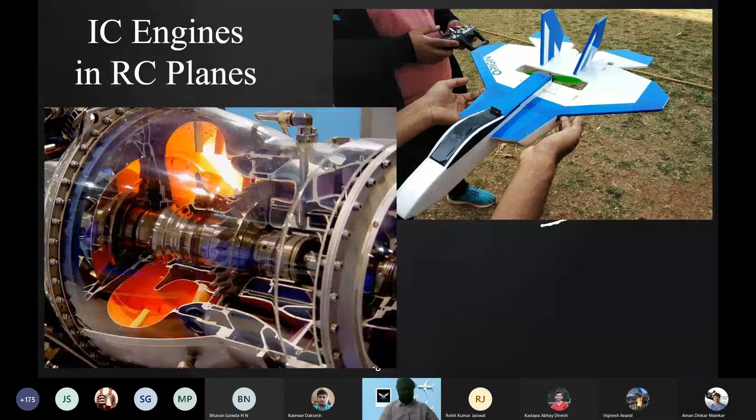One is IC engines. You might have known that generally the aircrafts that we make are battery powered. Your batch could be the first one to learn about IC engines, internal combustion engines, and their utility and implementation. Also, you know what? Your batch will probably be the first batch to be able to collaborate with the Aeromodelling Club to design and implement IC engines during your stay in INSTI. Isn't that exciting? Another is rocketry.

Also, you know what? Your batch will be the first one to decide over some of the GD topics. Yes, you are freshers. Anything, any idea that pops up, tell us in the chat box. Anything. Also, if you have any other ideas and don't want to discuss here, feel free to post on the WhatsApp groups you're a part of with us or DM us on Instagram through our group or anyone in person. Probably the GD you discuss with us is probably the best one that we ever have.

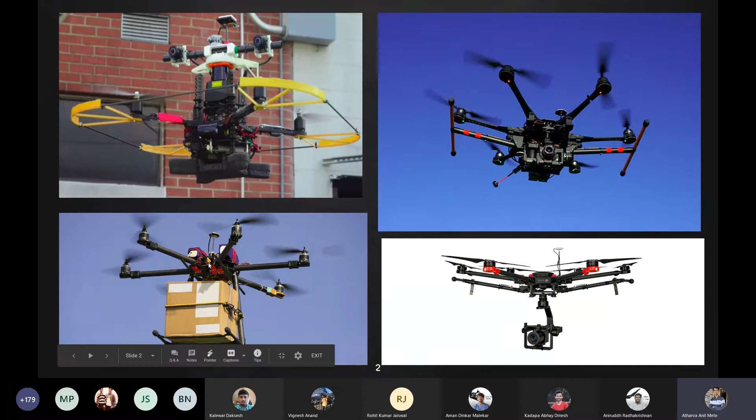So in this slide, you can see this is the drone used for reconnaissance missions. Here we have all the sensors like cameras. One camera is down, and this is the 3D lidar. This is usually used in a GPS-denied environment. This is the aerial photo. These types of drones are used in the film industry for photography, and you can see this is the drone used for delivery. So it has a lot of applications.

So let's talk about making a drone autonomous. What does it need? For making it autonomous, first of all, it needs localization. What is localization? The drone needs to localize itself with respect to the environment. What does that mean? It means it has to determine its current position with respect to its surroundings, right?

The second thing is perception. What is perception? Perception means sensing its surroundings. So it has various sensors on board like radar, camera, and many others. So it has to sense all these surroundings, and then it has to map the surroundings so as to see where the obstacles are and where the free space is.

Next thing is path planning. So till now we have our surroundings, and we have mapped them in terms of free space and obstacles. Now we set a start and goal position. Let's say point A is the start and point B is the goal. What path planning does is determine a path compatible with drone dynamics, with the path avoiding all the obstacles.

And the last thing is control. Control people basically make a controller, and the controller decides what thrust should be given to the motors so as to move our quad on our desired path.

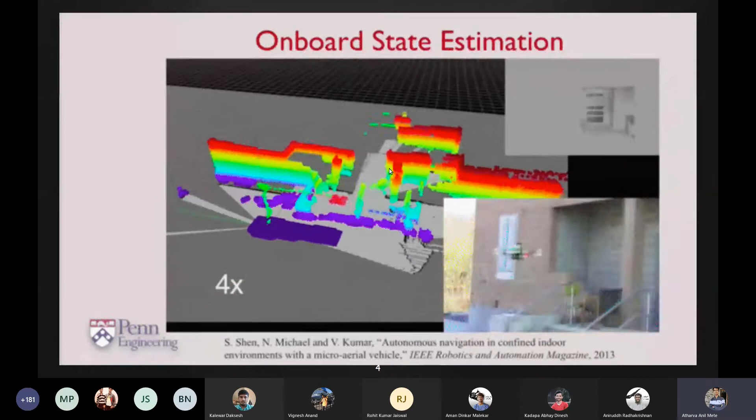So let me show you this. What's happening here is, this is the quad, and it's the same quad which I showed in the last slide. It has all the onboard lidars and cameras on it. It's moving in this house, which is a GPS-denied environment, and it's unknown. You can see here as the quad moves in, the lidar is basically mapping all the walls and free space and giving them color accordingly. So in this way it maps the environment.

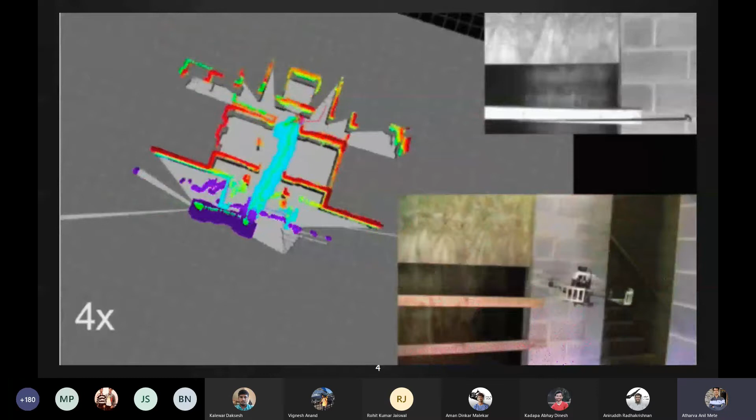This blue line is the path planned by our path planning algorithm. So this is pretty exciting, and let me tell you, don't get overwhelmed by these things, because you will surely get to know them over the years.

So now we had planned to show you a live simulation demo. Another thing I'd like to tell you: we had planned a live simulation, but there is quite a load on my system. So I just recorded a video. It's recorded, but it will be the same as the live one. So let me share that.

Yeah. I hope it's visible. Can someone confirm? Yes, it is. Okay. Cool. So yeah.

So what's happening here is, we are using this platform called Gazebo. It's a simulator. In this simulator, we have made this nice arena with frames in it, and I will zoom in on it. This is the quadcopter Iris. In this whole simulation we are using PX4 firmware. What PX4 firmware is, you'll get to know, but for now it's something with the help of which we can control the drones, right?

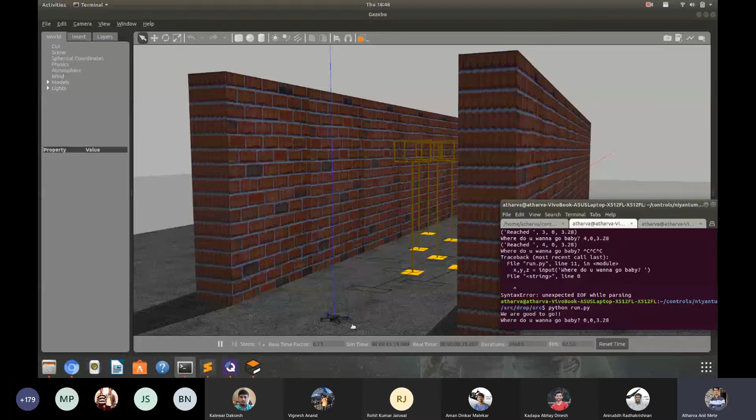You can see the propellers moving. That's what PX4 firmware is for, and for communicating our Python script to PX4, we are using the MAVROS communication system. Again, I'm saying don't get overwhelmed by it. So now I'm giving it a set point, which is 0, 0, 3.28, and you see it takes off to that particular position.

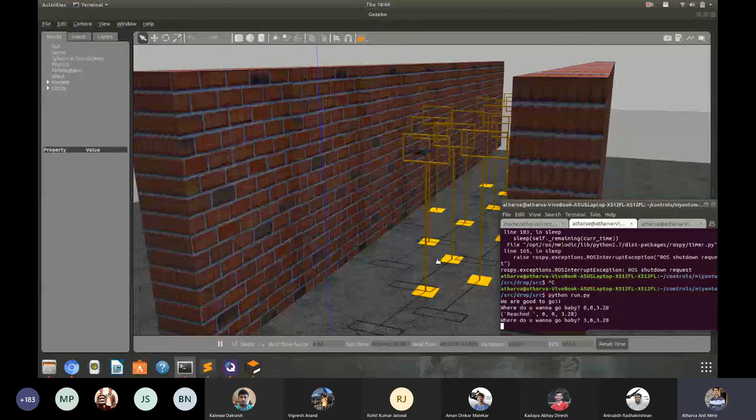And then I will make my quad pass through that frame. For that I'm giving the set point 3, 0, 3.28. So the quad will move to that particular point. And see, although it's simulated, it's quite similar to a real environment. We can even simulate wind in this.

Yeah. See, and again I'm giving the point 3, 0, okay, yeah, sorry, 5, 0, 3.28, and you can see the quad passes through that frame.

And let me tell an interesting thing, that I'm doing this by giving the coordinates, right? But in another mission, what we did was, you can see there is a camera in front of the quad. So what that camera does is, we use some machine learning algorithm and image processing to recognize these frames. So from the camera frame, it recognizes that particular frame, and then it finds the center of that frame, and then we publish that center to our code.

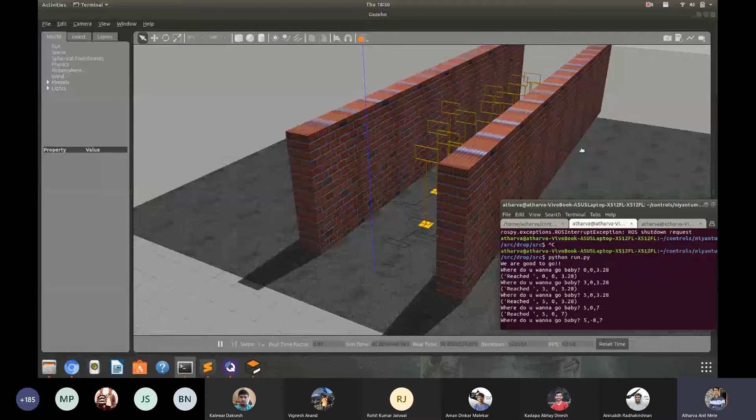So it's fully autonomous. We have made this system, but I thought giving coordinates would seem more interactive. So that's why we are doing it. But yeah, we have also made this system fully autonomous. So for localization, we generally use SLAM systems. SLAM is simultaneous localization and mapping. Again, don't get overwhelmed. You will get to know all these things, and it's pretty interesting. And see, the club is here for that.

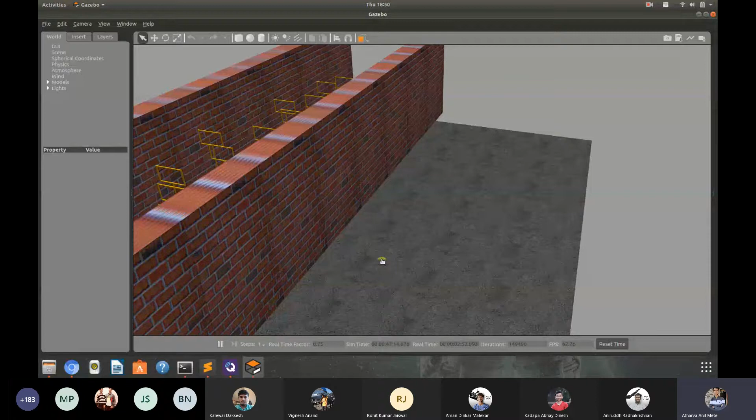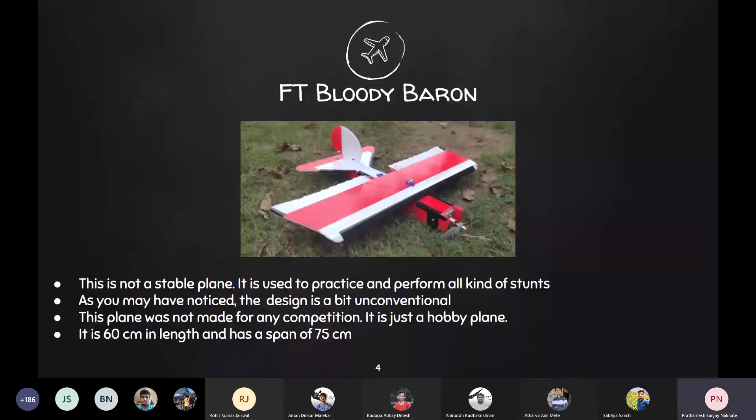So before showing a model of a quadcopter, I want to ask you guys a question. As you might know, in quadcopters, one pair of the motors rotates in clockwise direction and the other pair rotates in anti-clockwise direction. So do you guys know the reason behind this? If yes, you can answer the poll which I have posted in the chat, and if no, you can still try.

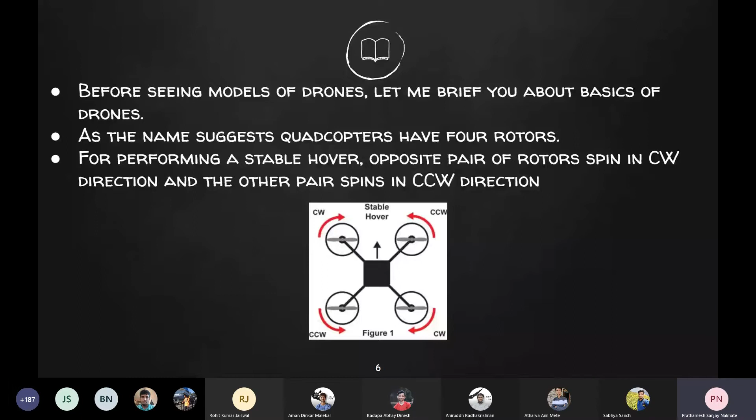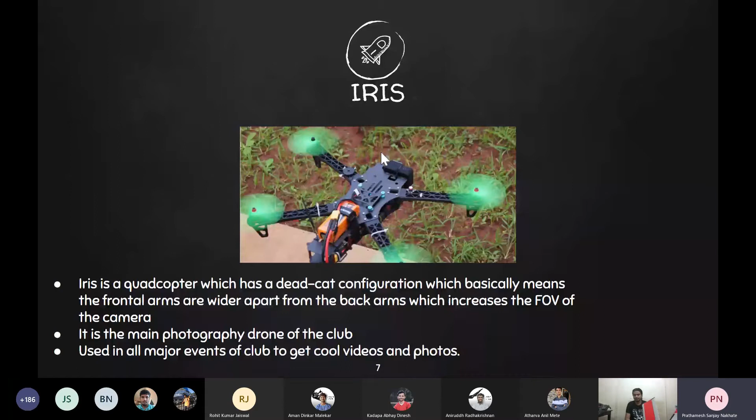Actually, this is the main photography drone of the club, and it is used in all the major events for taking cool photos and videos.

So till now we told you the different models that we have built, but you may wonder, where do we build these models? So actually there is a laboratory known as the Tinkerers Laboratory. It is the only student-owned laboratory of our institute, and it has all kinds of equipment like laser cutters, 3D printers. It also has some basic electronic components like Arduino, servos. So that's where we build them.

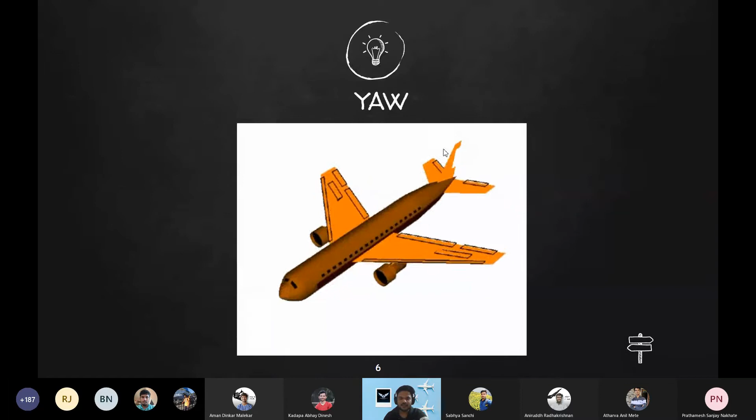So let's move to the control surfaces. All of you have seen the black parts in the wings and in the horizontal stabilizer or vertical stabilizer; those are called the control surfaces of an aircraft. So first we will talk about the rudder. The rudder is this, and it is the hinged part of the vertical stabilizer. It is used to deflect the tail from left to right as viewed from the front of the fuselage, and it does the yaw motion.

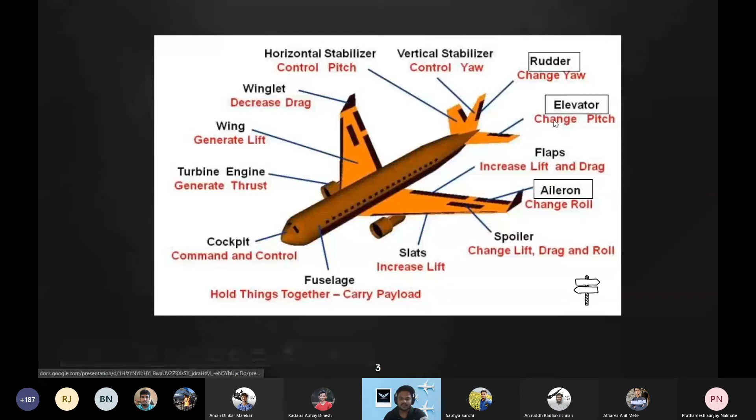Yeah, so now come to the elevator part. It is the hinged part of the horizontal stabilizer and it is used to deflect the tail up and down. Now let's come to the aileron. It is behind the wing and it is used to change the roll of an aircraft. You would be doing this in an RC plane.

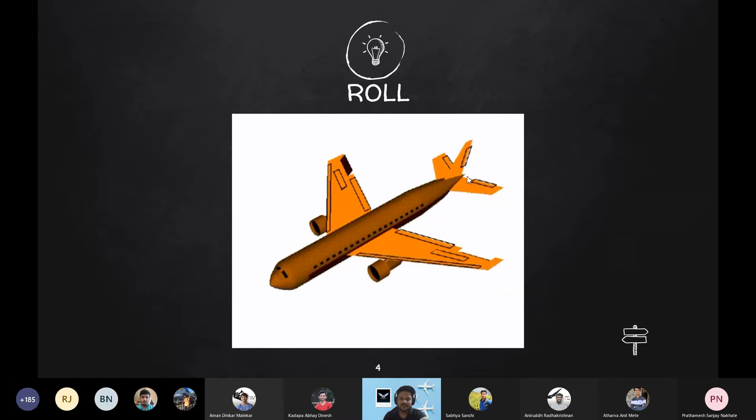Here is an exercise for you all. Next time, whenever you fly on an airplane, notice that the wing control surfaces move during takeoff and landing, and they are different in takeoff and landing. Additionally, you can try to observe that when the aircraft turns, its control surfaces are different.

Now let's come to the wing nomenclature. All of you are designing your wing in the glider event. So these are some technical definitions regarding the wing geometry. The front of the wing at the bottom is called the leading edge, and the back of the wing at the top is called the trailing edge. And the distance between the leading edge and trailing edge is called the chord, that is this, and it is denoted by C. So this is your chord.

Now the distance between the ends of the wing is the span, and it is denoted by S. The shape of the wing when viewed from above looking down onto the wing is called the planform. And in this figure, the planform is rectangular. The chord length at every location along the span is the same, like this. Everywhere it is C.

So can you think of another type of wing where it will not be the same? Like how about the triangular wing? In a triangular wing, the chord is not the same. And one more thing, the wing area is not the total surface area of the wing.

That is not the curved surface. The wing area we took is the projection area of the wing. Now let's come to a very, very important aspect of any wing design: aspect ratio.

Aspect ratio is a measure of how long and slender a wing is. The aspect ratio of a wing is defined as span squared upon area of the wing. And for this case, the aspect ratio is span upon chord. Now, this is the definition of aspect ratio mathematically.

But an obvious question is why it is so important in flight design. Well, a good aspect ratio for any aircraft provides sufficient lift and also reduces the drag. In general, high aspect ratio wings have long spans, like high performance gliders, and low aspect ratio are like fighter jets and all. Now let's come to the dihedral angle.

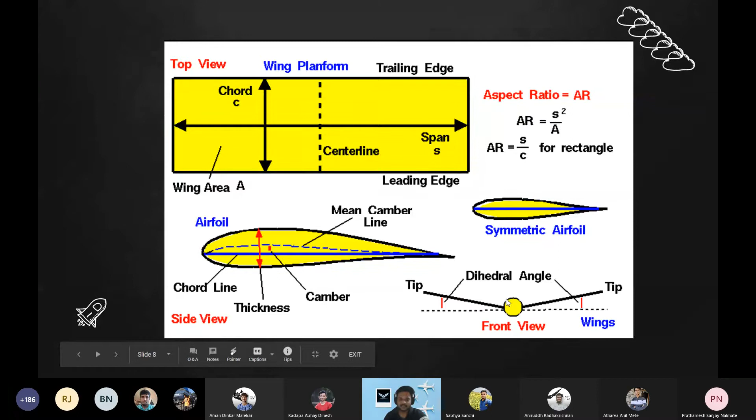So in this diagram, the wing front view shows the left and right wing do not lie in the same plane but meet at an angle. And the angle that the wing makes with the local horizontal line is called dihedral angle. Okay, so this is all the nomenclature of the wing, and this is the isometric view of a normal RC plane.

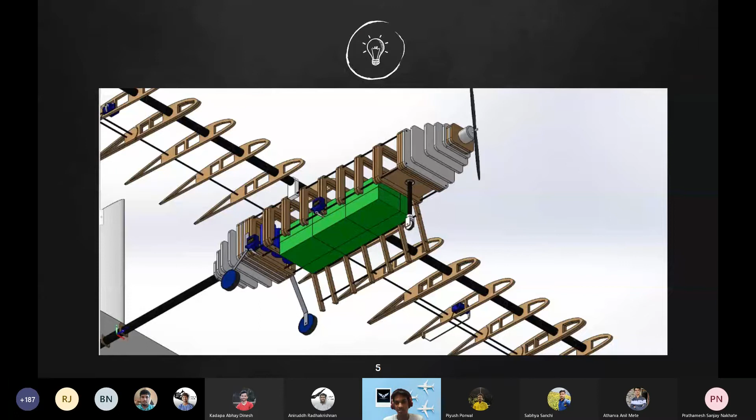And what are the things that you can explore? Number one, I think aero modeling, because of the amount of hands-on experience, gives you a very holistic view of aircraft and drones and aviation. So this picture is very interesting. If you just think about planes from one aspect, aerodynamics or structures or electrical, you will come up with some really crappy planes. But you need this hands-on experience to come up with a whole holistic experience and do well, both inside the club and outside in drones and UAVs. And this is what the club can give you.

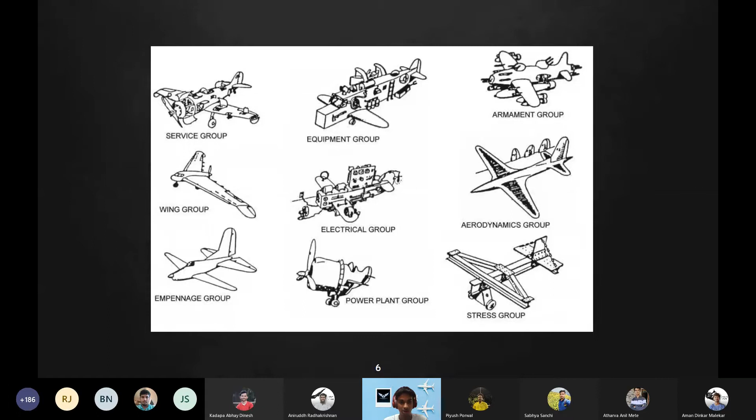And about one night before the competition, he came to the club and said, listen, I have no idea what to do. Please help me. And the club helped him and he got an honorable mention in the competition. And this just goes to show that the club is a very open, welcoming place, and if you have any ideas, need any help, the club is always there for you, right?

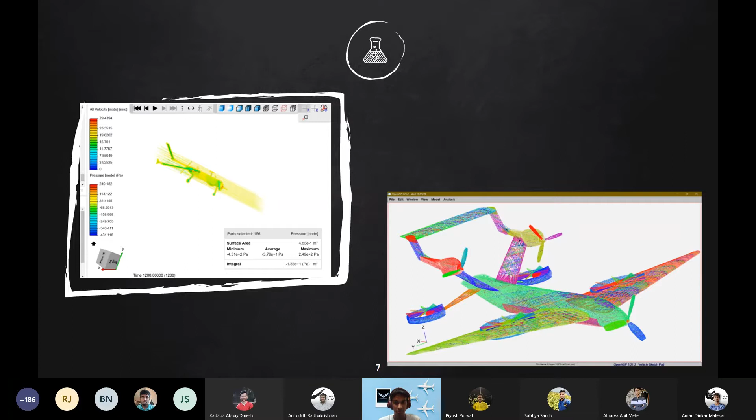And if you're bored of just planes, you can combine the world of drones and planes to make this: a tail-sitter VTOL aircraft that one of our club seniors made and went on to fly later as well. And there's so much to explore in this field, right?

And like I said, what's unique about the club is the hands-on part. You can learn the theory, you can buy the textbooks, you can do all of it. But unless you're working and building and flying these aircraft, you're not going to understand the intuition behind any of this. And that's very important.

But apart from all this, my favorite part of the Aeromodelling Club is just that it gives you a peer group with common interests with whom you can have fun, work, learn, explore. And that's why the club is the perfect place for anyone who's interested in drones and fixed wing and anything that flies around.

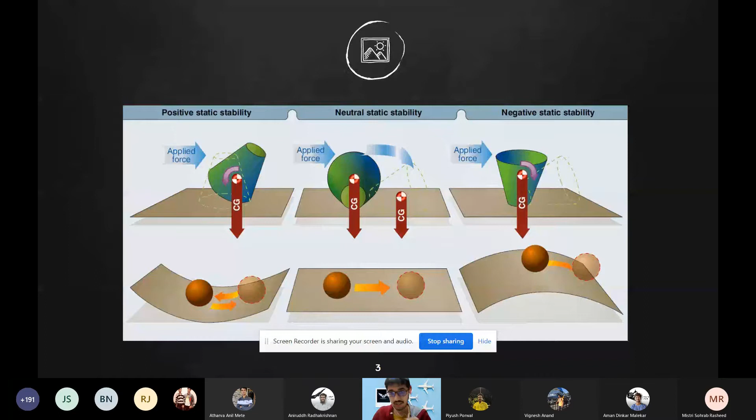In our high school years, we did study this aspect of stability: positive, neutral, and negative. I'll repeat it in brief. So take this object. If you push it and it comes back to its original position, that's positive. If you push it and it just doesn't resist any change, that's neutral. And if you push it and it actively goes further away, that's negative static stability. Just keep that in mind.

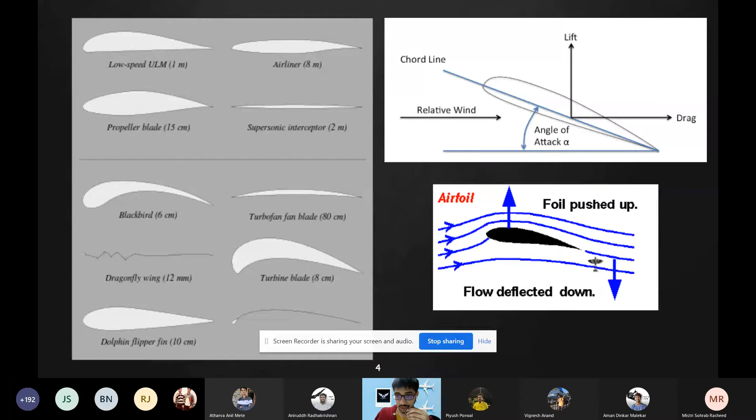Before we proceed with stability in more depth, let's take a look at the airfoil. So this is an airfoil. They come in various kinds, and the first terminology I need you to know is angle of attack. The angle between the chord line and the incoming wind, that's angle of attack. By the way, the airfoil is the cross section of the wing, I may have forgotten to mention that. And how does an airfoil generate lift? It kind of pushes the air downward, and by Newton's third law, it generates lift.

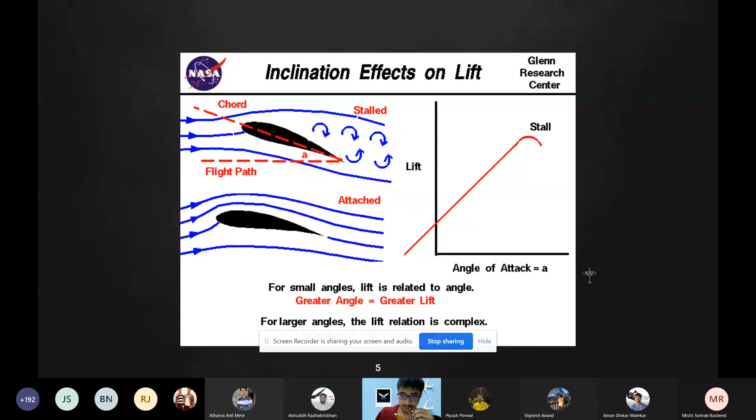So someone asked in the chat, how does a symmetric airfoil produce lift? You see on this graph, this is not a symmetric airfoil, but even if it were a symmetrical airfoil, the curve would pass through the origin, and with the increase in angle of attack, the lift would increase. So that's one thing you need to keep in mind.

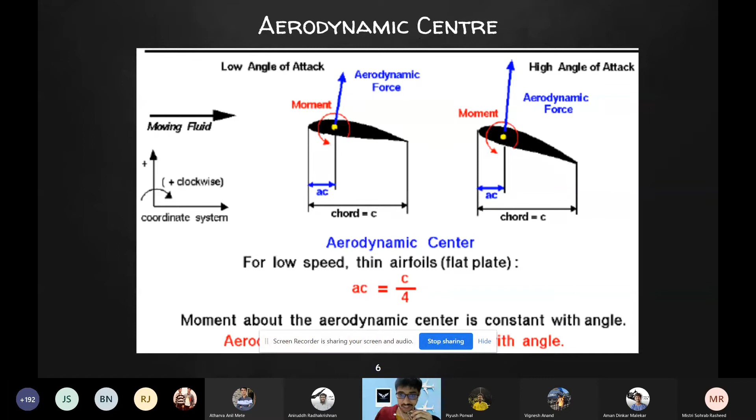So now let's continue with what's aerodynamic center. Now, aerodynamic center is a point on the airfoil where the moment does not change with the angle of attack. That's pretty fascinating given that lift changes with angle of attack. Just again, a concept that will come again later.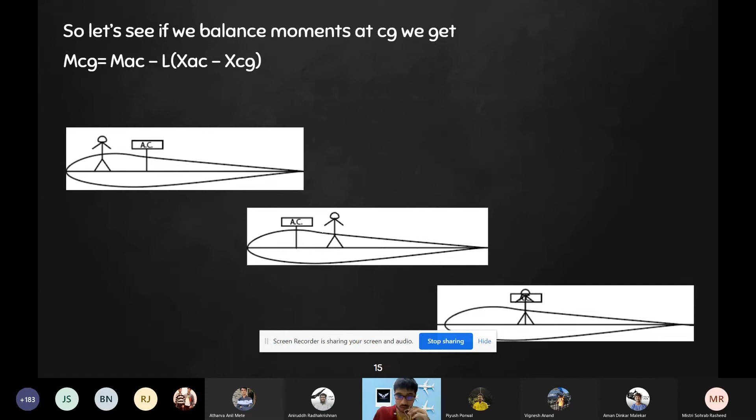Let's see finally what happens if AC is at CG. Well, then MCG is equal to MAC. And as we told you, MAC does not change with angle of attack, so it's just constant. That's what the neutral line represented. But again, that's not stable, right? Okay, so a stick and wing does not work. So what to do? The plane does fly, right? Well, yeah, it's the tail. We forgot the tail. Maybe not this tail, the aeroplane tail.

So what does a tail do? The tail takes care of this problem by giving an extra moment that stabilizes the entire system. I'll explain that more with the neutral point in later slides.

Okay, so we need a tail, but how big must the tail be? For that we have a ratio called the tail volume ratio. You can see here, that's the tail volume ratio. By tail I mean horizontal stabilizer, just keep that in mind. So H is what we need. V is vertical stabilizer, that's the yaw stabilizer. We'll come to that in the yaw correction part.

LHT is XAC minus XCG, the thing which we discussed earlier. That's the moment arm, just a terminology again. SHT is the horizontal stabilizer area, SW is the wing area and CW is the chord length. Okay, this is all formula, but what does this formula actually mean? Note, this is a non-dimensionalization of the power of the tail, or the effect of the tail on the wing.

Jay, if I may interrupt you just a minute, to address some of the queries of people. Don't worry if you find this overwhelming. No issues with that, because when the actual build process starts, you have mentors. Mentors will guide you through each step of building and will clear your doubts there. So just hang on until we are done with this.

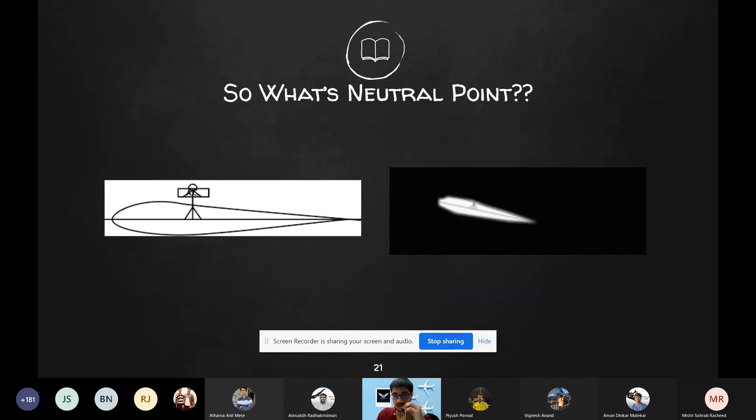Why is this neutral point important? One thing to keep in mind is that the neutral point of a wing is the aerodynamic center, because when CG is equal to AC, this happens. What about the neutral point of the tail only? That's the aerodynamic center of the tail. Now, what will be the neutral point of wing plus tail? That will be the weighted average of the neutral point of the wing and the neutral point of the tail.

So what's the use of this neutral point? Remember I told you that if CG is ahead of AC, the slope is negative, but we get a negative lift. So it's stable, but with a negative lift. So the CG must be ahead of the neutral point for stability. The last thing I need to mention is the static margin. The more the difference between CG and the neutral point, the more the stability. The distance between CG and neutral point is given by the static margin. Just a term that will come in handy.

What if you have CG behind the neutral point? I've taken a video of what will happen if CG is behind the neutral point. So don't try that, because if this happens, with slight turbulence your plane would just kind of flip.

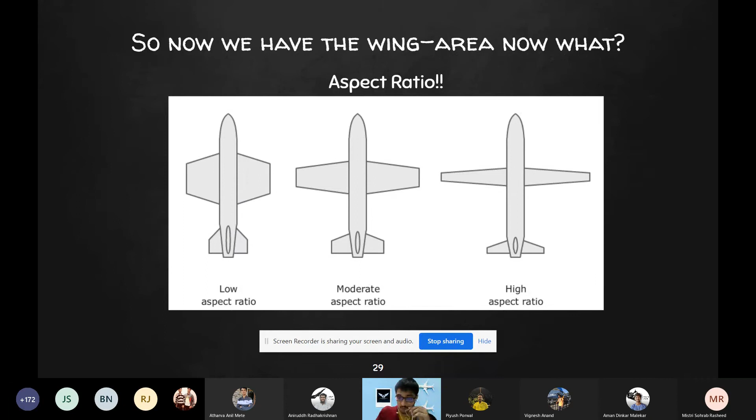Remember aspect ratio? That will come in handy here. The aspect ratio will give us the span and the chord. With the span and the chord of the wing, we have all the dimensions required for the wing. By the way, the aspect ratio you need to take is between 6 to 8. Again, that's experimental data. Like 7 or 7.5 is also okay. It may increase a bit, but do not go below 6. It will create problems.

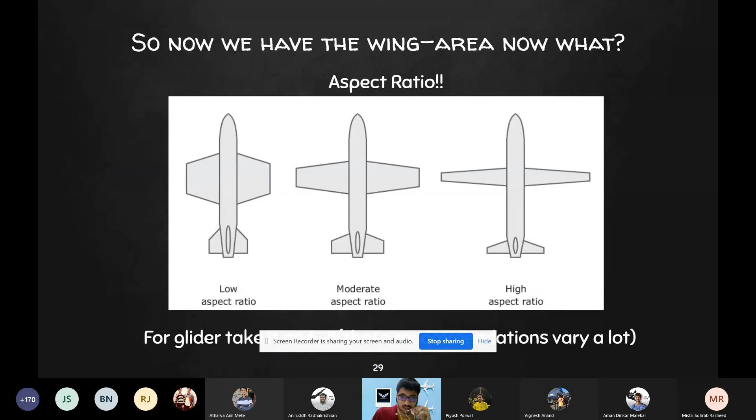Now we have the wing. So now let's start with the stabilizers. For stabilizers, we'll use a tail volume ratio, which I mentioned in some slides before. In the formula, there was this moment arm xAC minus xCG. That's done experimentally, and it's a bit involved. So we did that for you, and it comes out to be 11 centimeters.

So now if you plug in the values, the rest of the values are just given to you, it's approximately 15 to 30%. That's the area ratio of the horizontal stabilizer to the wing. Now you take the same measurements for the vertical stabilizer, and that ratio comes out to be 8 to 16%. Your main thing is just to make sure the ratios are satisfied. You do not need to come up with the entire calculation.

Okay, so now we have all measurements. Let's start making elements like airfoils, wing, and all those things. So first, take a cardboard. Cut out the outer layer of the cardboard. You do not need the entire cardboard, it's too thick and too heavy. From that, with the measurements given, make this cutout. If you have a chord of like 6 centimeters, the width of this cutout must be 12.5 or something. You need to leave a bit of margin for the folding.

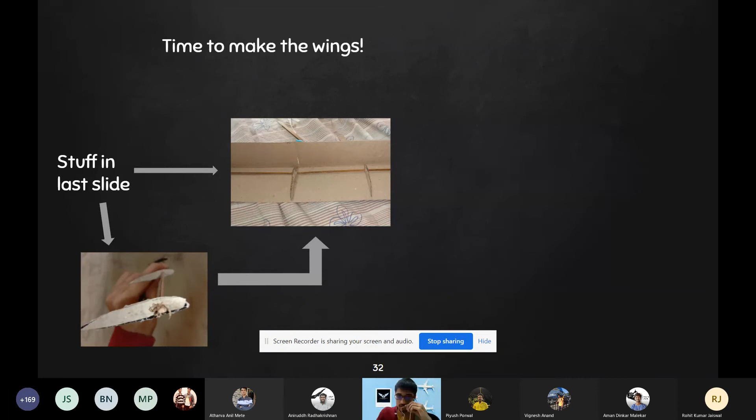And these are the ribs, the bunch of airfoils visible in the image. And the central broomstick is the spar. Now you place that in this cutout we made and fold. The entire process is done step by step in a YouTube video, which we will be providing you. So don't worry if you don't get it. Just keep in mind the overall picture. Don't get worried about the details.

Okay, now let's make the stabilizers. Now stabilizers, you just need to cut cardboard pieces in the right dimensions. Do not stick them now. This is just for illustration purpose. In this step, it's just cutting, nothing much.

Okay, now the final step is not the final step, by the way. This is the final step of the build, not trim. So this is the time to assemble stuff. So now we have broom bristles, the thing which we mentioned to you in inventory and the last few slides, and you combine that to make this. So what you need to do is take 2 broomsticks or broom bristles, whatever, and tape the head. Tape it in such a way so that there's maximum contact between them.

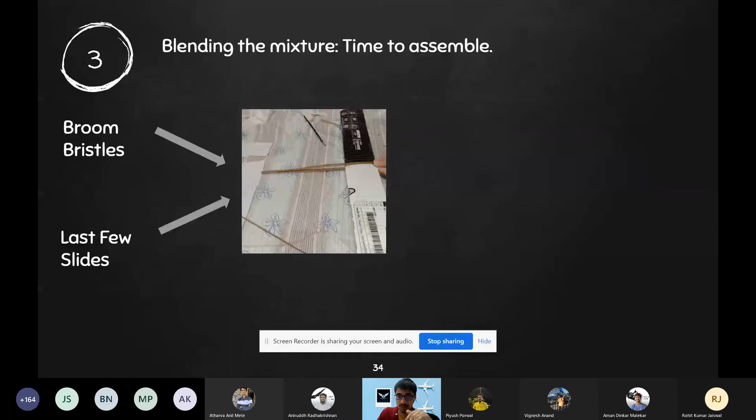Now pass your wing through the broom bristles and make sure that you press the broom bristles in such a way that there's a strong grip between the wing and the broom bristles. By the way, that broom bristle will make the fuselage. Okay, just remember that. Yeah, so it will look something like this. And finally, you tape the wing with the fuselage.

After that, you add the stabilizers. Now, adding the stabilizers is similar. You just need to tape, like, whatever adhesive you are using. You just tape them and add adhesives, and yeah. Finally, the plane would look like this minus the rubber band. Rubber band comes into the trimming part.

Well, we are almost ready, but now the last and the most important part, the trimming. I mentioned trimming in a lot of slides, in the stability also. It's the entire reason we go into the stability business. Now, while you made this thing, you now need to make sure that all the moments are balanced. To balance the moments, you need to just ensure about 2 movements. The yaw is automatically balanced by the vertical stabilizer, that triangle shape protruding out here. So roll and pitch need to be stabilized here.

Now roll will be stabilized easily by adding a dihedral if you can. Okay, it's not recommended. If you can add a dihedral, dihedral is again the angle between the wings, like this. But if you can't add a dihedral, add an aileron. Just cut at 2 edges and intuitively set it in such a way that it does not roll. Apart from that, now you need to make sure the pitch is balanced.

Now pitch stability is what we talked about in the stability section. You need to make sure that it is not tail heavy or nose heavy. So what you need to do is make sure that the CG is at C/4. Now, why C/4, by the way? You remember the neutral point of the wing is at C/4. But when the neutral points of the wing and tail are added, it's an average. So C/4 comes in the safe region. Okay, so just keep that in mind. So you need to make sure that the CG is around the C/4 region.